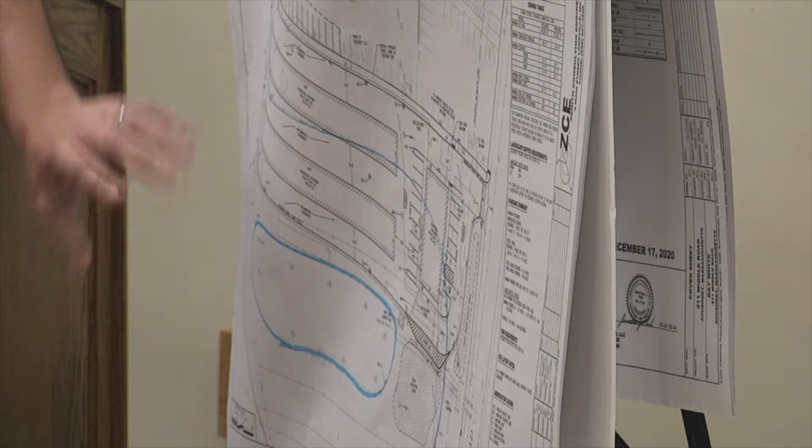Let me flip this over. So the blue highlighted here is the existing pond. The blue here is the 100-foot buffer from the bordering vegetated wetland and the pond. So anything here and over is all within your jurisdiction, completely within the buffer zone.

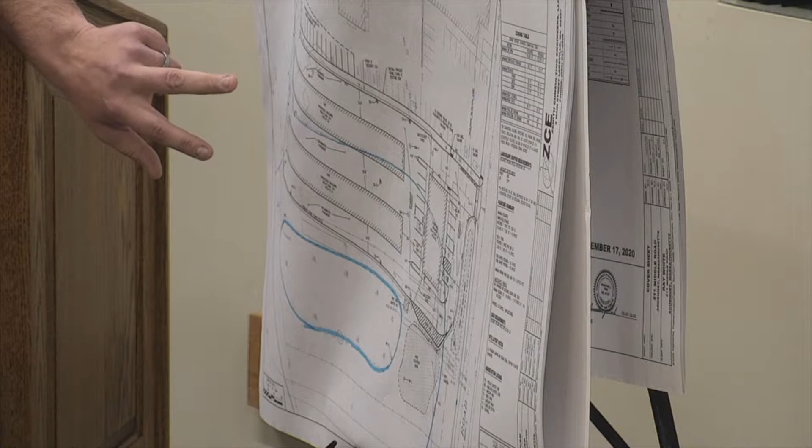So we have a 40 by 80 commercial building up in the front, and 2 30 by 240 foot long storage buildings located in the rear. Like I said, it's all going to be located within that existing area. There's nothing going back into the field - it's all going to be as close as it can be to Middle Road.

This is considered a redevelopment project. There's existing impervious coverage there now. This is a true redevelopment project where we're taking something already developed and redeveloping it into something more usable, more current.

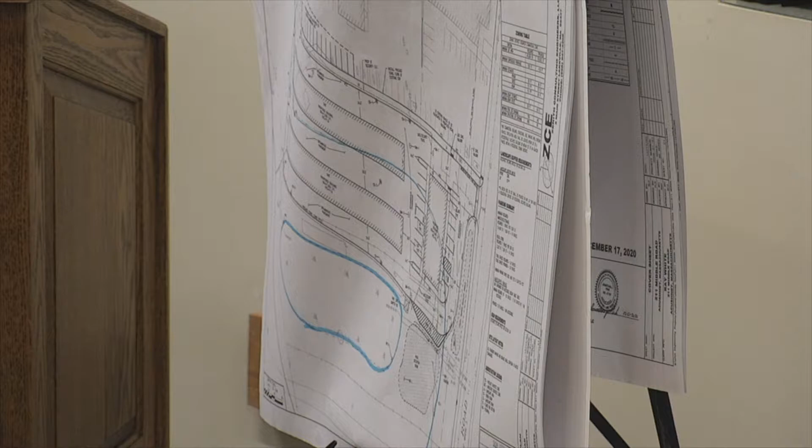So all the drainage, Miles? Yes. Miles, before you do that, would you hold it up just so the folks back there can see it? I absolutely can, so they can have a sense of what's what.

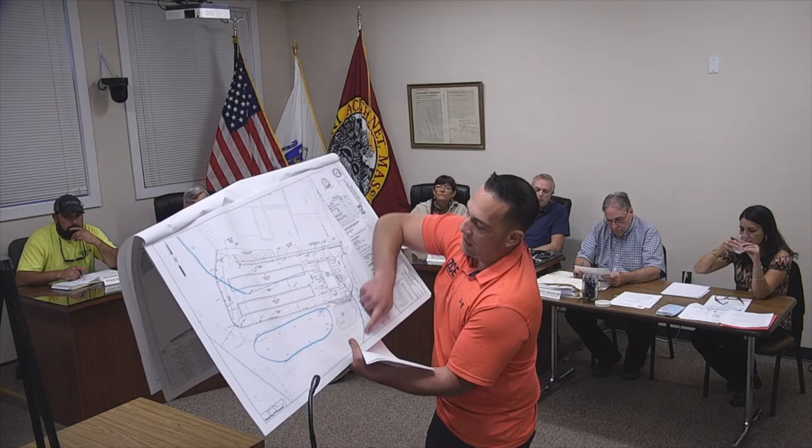So here's Middle Road. This is the existing building and parking lot. This is the pond, and this is the access out to the back off of Middle Road. This is the existing pond - I call it the cow pond. And this is where the existing adventure park is. This blue line you see here is 100 feet from the pond, so this is what the commission has jurisdiction over. That's why we're here now.

What we're proposing is a 40 by 80 retail building, and 2 30 by 240 foot long storage buildings. There's also associated pavement with parking and access and drainage that goes along with that, which I'll get into next. This just gives a brief overview of what's there.

Where's the drive? It's way up - not even close. It's down where the sign is, the big white sign. This isn't even close to the New Bedford line - it's literally up on the Middle Road side.

Let me see if I can show an overview of the property. This dark line here is the New Bedford line. That's Rhonda Drive here, running parallel. Our project is here, up by the existing buildings.

Is there gonna be only one entrance from Middle Road? You're not gonna have anything back from the New Bedford Road going into there? And then everything's gonna be pushing with access - no. Folks, for the record, if you are going to ask a question, we need your name. Mary Ann Barboza, 1028 Rhonda Drive.

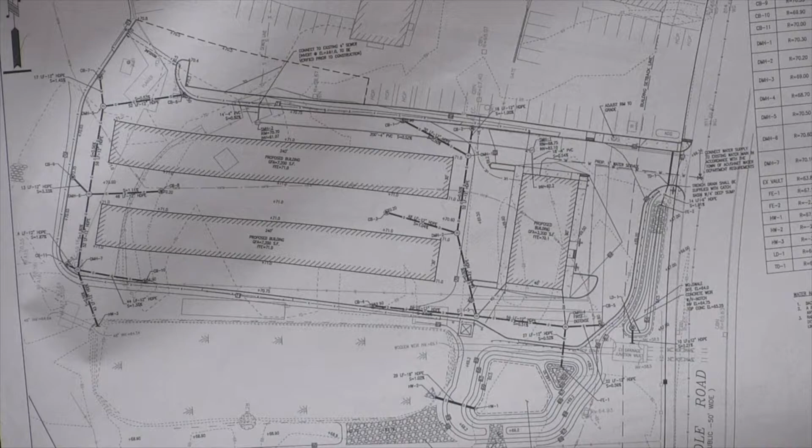So what we've done is we've proposed deep sump hooded catch basins along with drain manholes that convey all the stormwater produced by this project, and then it's ultimately discharged either into the existing pond or into an additional detention basin that we've proposed as well.

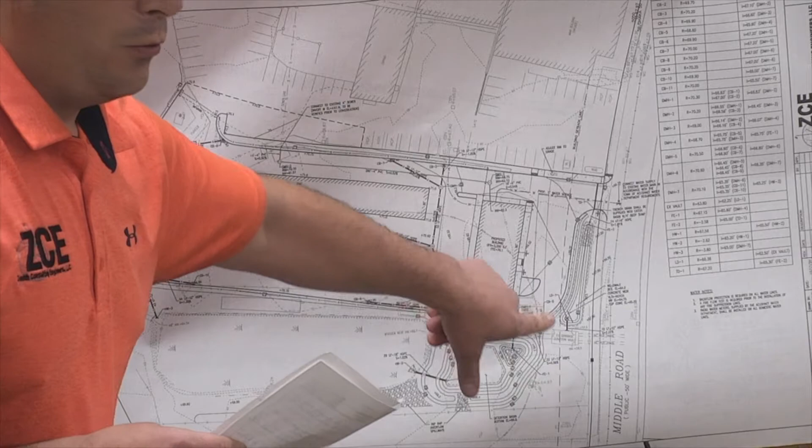We did a full analysis because there's a significant watershed that comes off of this property, and even from the New Bedford side, water comes down into this property. So we did a full drainage analysis of that, because we have to ensure that we're not going to affect any of the downstream abutters or abutting properties.

So what you see here is we've gone through a full analysis, and everything will handle up to a 100-year storm event, which is required by DEP stormwater management.

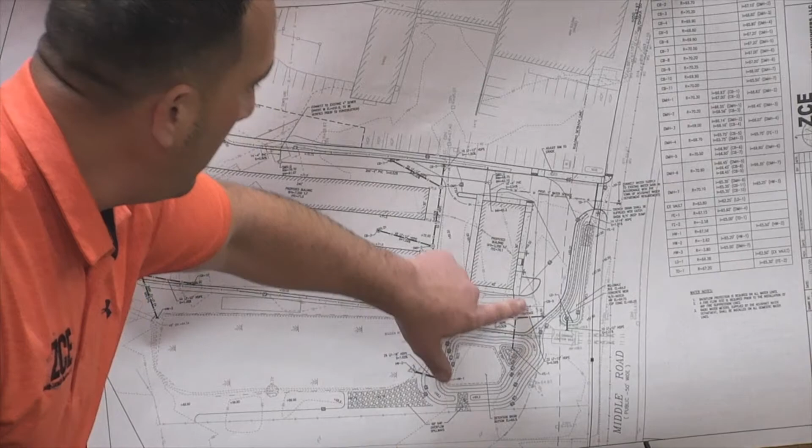So basically you have this basin, this pond here, that overtops and goes into this proposed basin here. There's also another little water quality swale up in the front that we're using to capture the water before it gets out into Middle Road.

We have to ensure that nothing can get out to Middle Road. So what we did was propose a trench drain, or trench grate, right at the intersection of Middle Road and our access way, and that discharges into this water quality swale, which then overtops into an existing concrete vault that was already there.

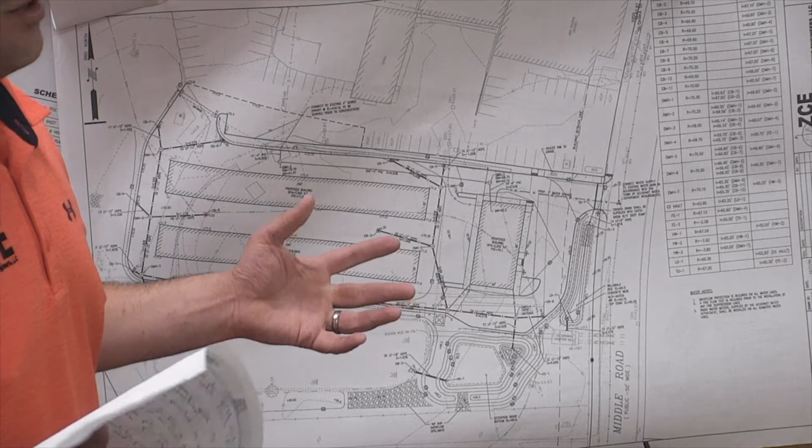That vault has been used for years and years, which I'm sure Mr. White knows about a lot better than I do, but it's actually pretty impressive — a huge concrete vault with culverts and such that were constructed, and that's what's being used to control flow.

So what we had to do is make sure that the flow going in there in the existing condition wasn't going to increase in the proposed condition. So that's what we've done, and we provided that documentation in the form of a drainage report to the commission.

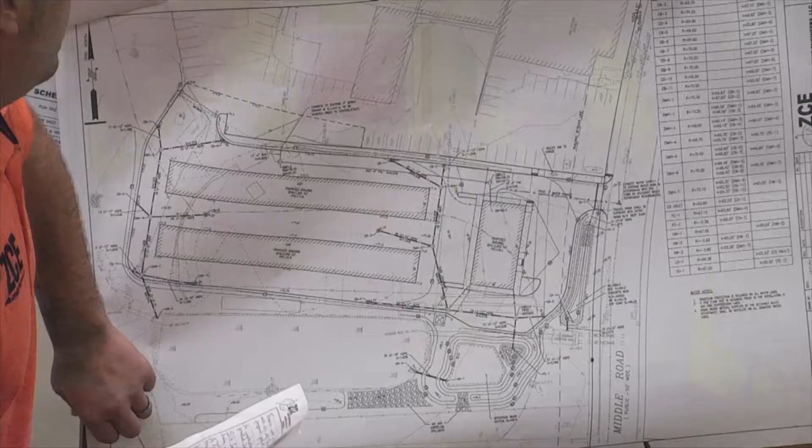Another question — so you have that new drainage basin that, if need be, will also overtop into the one that's going to be parallel with Middle Road, correct? So this actually overtops into the vault. It does. And this overtops into the vault as well.

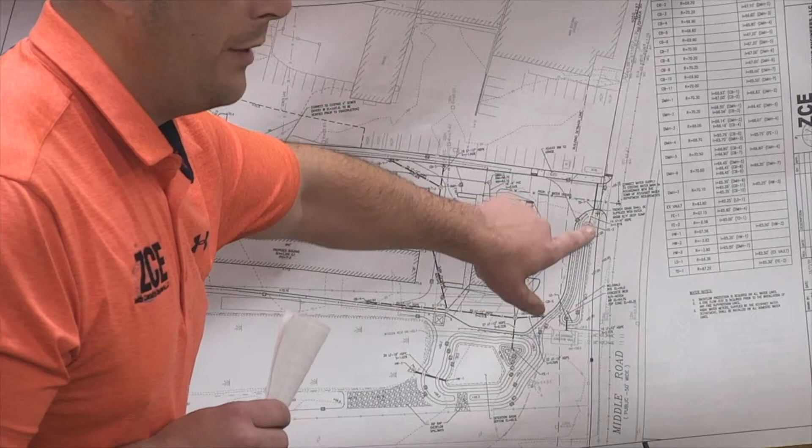So this is capturing most of the water coming from the front that we couldn't get over to here because of elevation. So this is just acting as another water quality feature. And then that will overtop, if it does overtop, into that concrete vault — same thing with the proposed basin we have here. They will all overtop into that concrete vault.

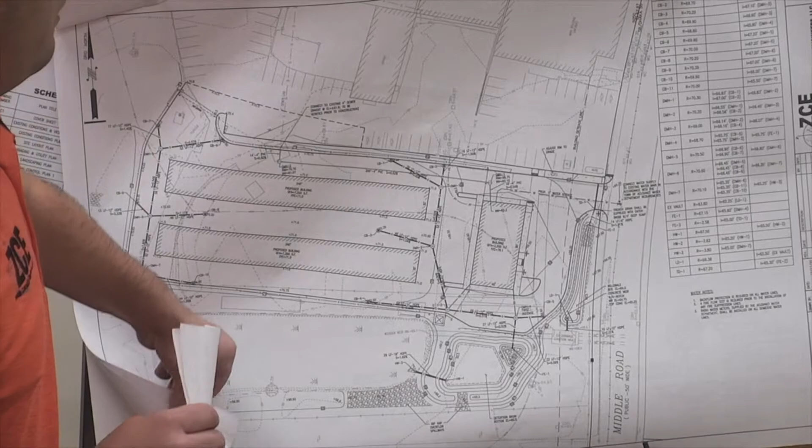So that's kind of a summary of what we have for drainage. This is the landscaping — I'm not gonna go too crazy with this, but this is just showing the screening we're proposing, especially along Middle Road, to ensure it meets some of the requirements from zoning that need to be met.

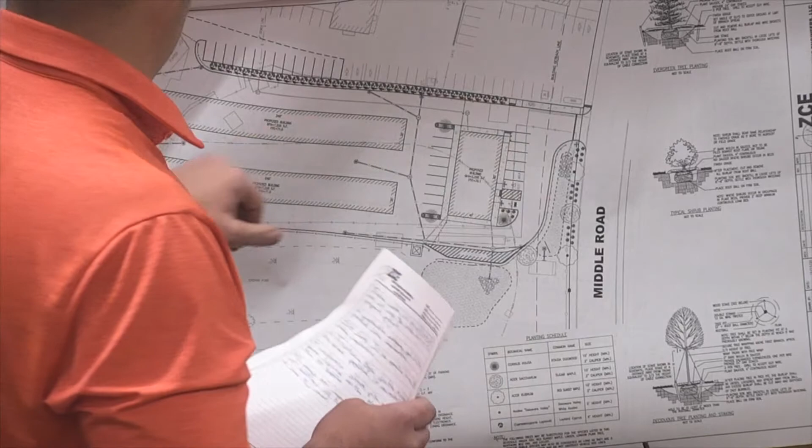And we are proposing some here. It's going to be completely fenced in because it is a storage facility, so we want to make sure it's protected. There are also some details on the shrubbery and a call-out of a legend of a planting schedule, things of that nature.

This is more the meat and potatoes of what the commission's going to be looking for during construction — this is our erosion control plan. It's really important to ensure there won't be any issues during construction, or if there are, the commission has ways to go to the contractor and say you're not meeting this requirement or this plan, we've got to do something about it. We have measures in place here to ensure that can happen.

So what we've done here is we've encompassed the entire proposed limit of work with silt fence and silt sock.

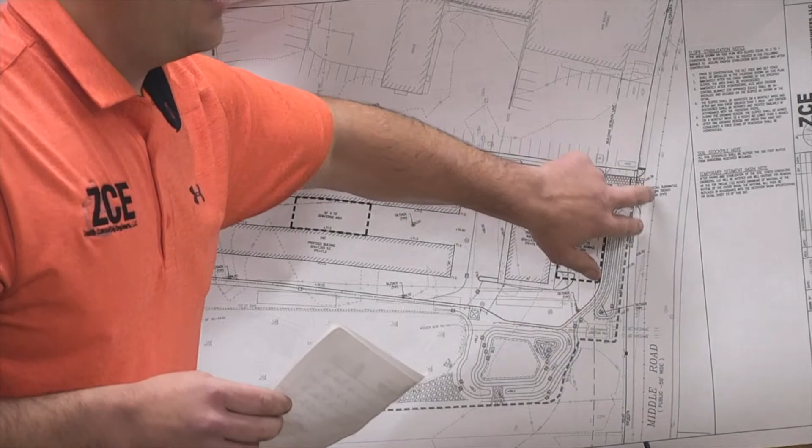So there's that. We've proposed a construction entrance where the proposed entrance is. That's just like a riprap pad for when the trucks go in and out, so when dirt gets on their tires, it knocks the dirt off. It doesn't necessarily go into the middle of the road, but if it does, there's sweeping requirements that need to be met every day, where the contractor needs to go out and clean it up. These work really well, especially on fairly larger projects.

This other square here is a stockpile area that we're keeping outside the 100-foot buffer zone. During construction, there's going to be material that needs to be piled, so there's a designated area there. We want to make sure it's not stockpiled near or in the wetland, so we're trying to show them they have an area designated to put it somewhere else.

We also have a proposed dewatering basin. As everybody knows, it's a very wet site, very wet area, so it's most likely that water will be encountered during construction. We have a dewatering basin in place with a detail showing how to pump that water out if it is encountered.

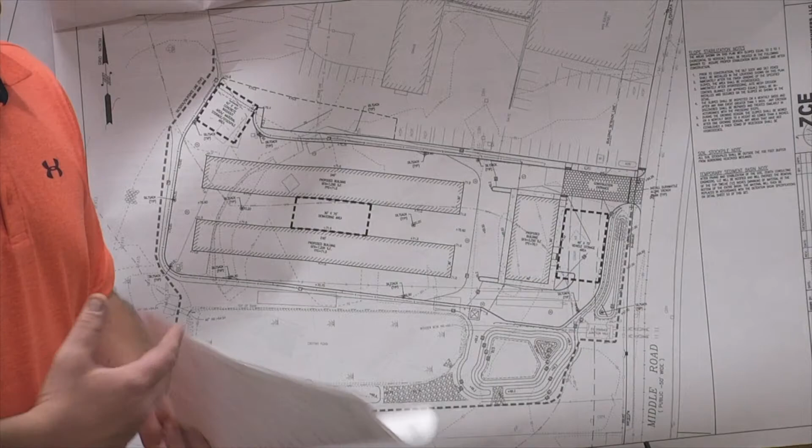Lastly, as far as erosion control goes, all the catch basins will have silt sacks put in them during construction. Those are basically like a tarp or canvas that gets put underneath the grate, and instead of silt flowing into the catch basin, it gets collected there, and as necessary it gets pulled out, cleaned up, and put right back in place. The idea is that post-construction those won't be there because everything's stabilized, pavement is established, loam and seed have been established, and we have a good lawn with hopefully no erosion at that point. So that's just something we'd be utilizing during construction.

What else? Basically all the areas that aren't improved by either building or pavement will be loamed and seeded to ensure proper stabilization. So as far as conservation goes, I just wanted to give a brief overview, and I'd be happy to answer any questions the commission or the public have.

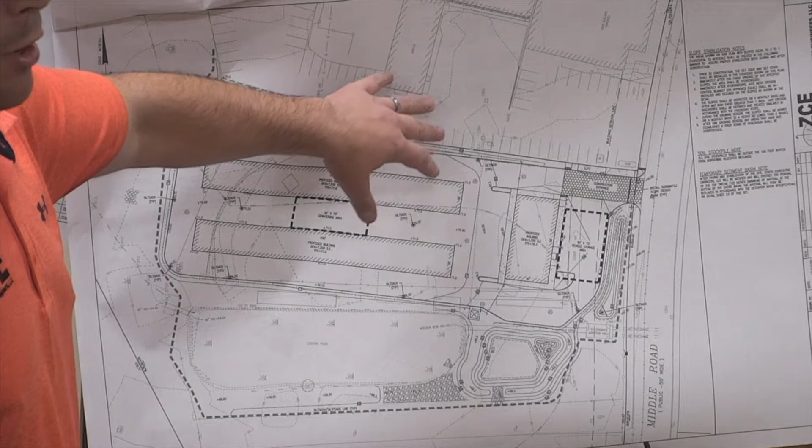You mentioned your stockpile area is outside the buffer zone. In terms of overnight vehicle storage, will there be construction vehicles there overnight, and where will you keep them? Yes, they will most likely have to be kept outside of it. We put that there as well - this is kind of a concrete washout area. Vehicles could be parked on the existing pavement that's out there. A lot of this area, if you've driven by, isn't being used, so we're actually utilizing some of it for parking at the facility. They could easily park on the pavement outside, completely outside.

Anybody on the commission with questions, or Pat? I've got a few. You guys have done. You good? I'm all set.

Hazardous material storage inside the storage buildings - there needs to be some kind of prohibition, because you're in the buffer zone in most of these storage buildings. Yeah, that's usually something that goes with when you sign up. I've dealt a lot with these storage facilities, and typically that's part of the lease or agreement contract signed by the person renting and the owner. So I'd recommend to the commission that be a special condition in the NOI. Absolutely.

And then the silt sock - is it a silt sock or a straw wattle? Whatever the commission would like. Typically we do a silt sock. What size silt sock would you be doing, either 8-inch or the 12-inch blown-in? The reason we proposed 8 inches is because we're also proposing a silt fence, so there's added protection there. If it was just going to be the silt sock, I would recommend going larger. How would you feel about doing the 12-inch sock, blown in, and then you wouldn't need the silt fence? There wouldn't be any earth disturbance through that area, and it'd be a very easy cleanup at the end of the job.

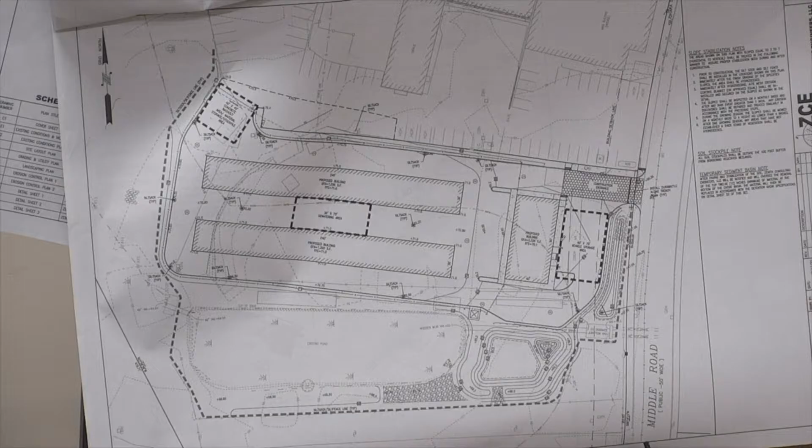Mr. Wood, any follow-up comments as the owner of the project? No, I'm just trying to make use of the land. It's a tax burden, and without some kind of revenue, I'm trying... believe me, I don't want to have to do this, but I don't want to sell the land. So I'm trying to figure out a way to pay the taxes, so I don't have to sell it. It's been there since Mayflower, and I don't plan on selling it.

Hearing no questions or comments from the crowd... Can I ask a question? Yes, please. Nancy Soers, I live at 803 Phillips Road. So they said they're gonna have a building, is it gonna be the business there, in the front? Yeah, my daughter has an established hair salon with a big clientele, and they plan on closing where they are and moving over here. And then I have an upholstery fellow in front that is looking to probably rent. He's already there on the property. He does antique furniture, and he actually wants the other half, which is 40 by 40. And my daughter's will be 40 by 40. My daughter would like to see something busier there, because it would bring in more people.

Anybody else? All right, as I mentioned, we can't vote on this because we don't have a DEP file number, so I'll entertain a motion to continue to the next meeting. I'll make that motion. Do we have a second? Second? All in favor? All right. Thank you very much, Mr. Zaidi, you guys have a great night. Thank you, all of you. Motion to close the hearing? I make a motion to do so. Is there a second? Second. All in favor? All right. Now we're on to a certificate of compliance, and we won't be insulted if you all leave now.